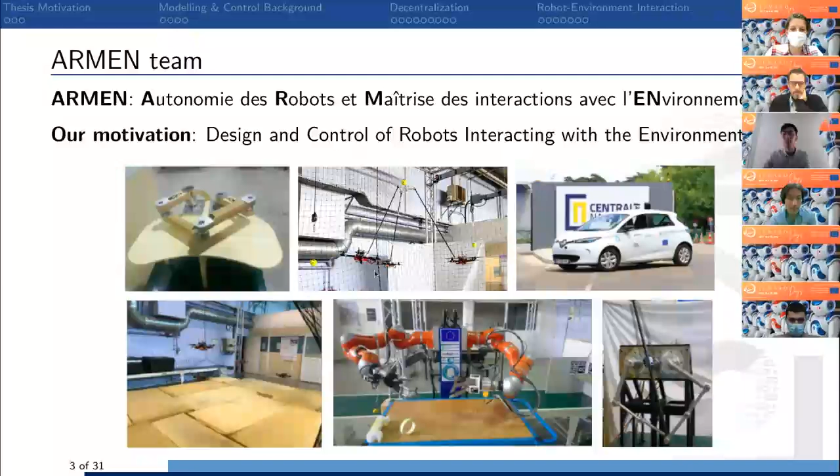Particularly in the drone group, we are mainly working on the design, control, and perception of aerial robots, just as I said for our research team.

Currently, we have 3 main PhD theses. Here, this is a flying gripper, I will mention it later because it is highly related to my topic. Also, we have 1 PhD student working on drone formations, in which multiple UAVs are controlled in their internal formations by an MPC controller. And also the flying parallel robots is my PhD thesis.

In our group, each year we also propose quite a lot of master projects. For example, there have been quite a lot of projects working on aerial cable-driven systems, where multiple drones support a payload using cables.

This year we have 1 project working on drone detection using deep learning algorithms, and also 1 student working on drone flipping, using a real-time simulation environment for validating his controller.

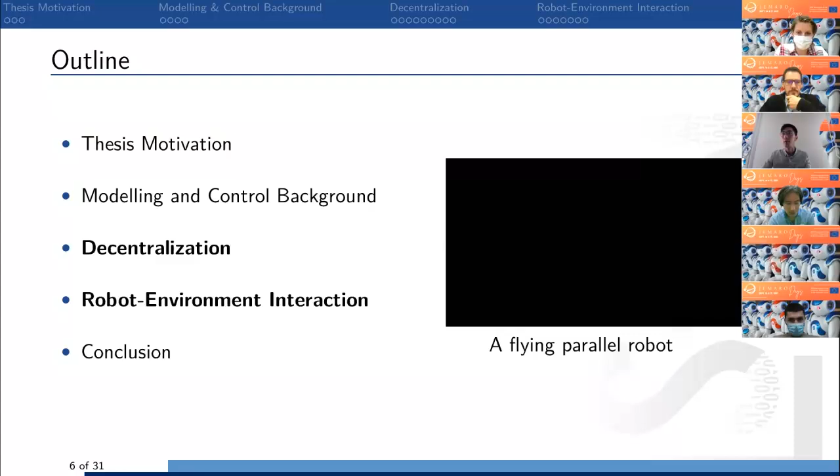So now, aligned with our motivation, my thesis is about a flying parallel robot. It is a new robot design with 3 drones. In the following, I will talk about the thesis motivation, give some modeling and control background, and also the main parts of my work: the decentralization of the robot and robot-environment interaction. Finally, I will give some conclusion and perspectives to finish my presentation.

First, let me give a quick talk about the context of my thesis: aerial manipulation. This domain is an emerging field where aerial vehicles, UAVs, are equipped with robotic arms or end effectors for grasping, transporting, and manipulating objects.

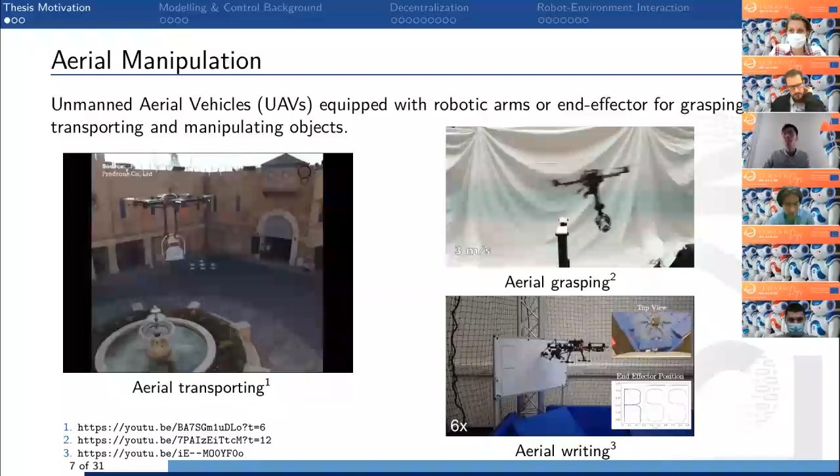As you can see in the example here, a very simple way of designing such robots is just to combine a multicopter with a classical robotic arm. There have been quite a lot of architectures proposed in the literature for aerial transporting, grasping, and even for aerial writing tasks.

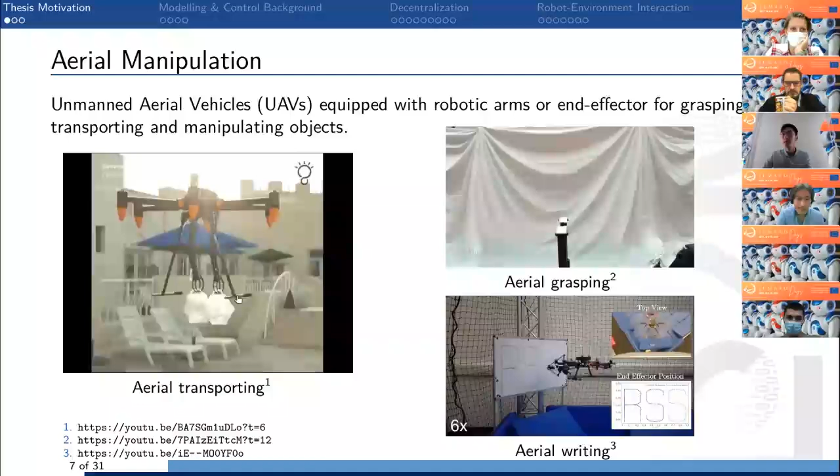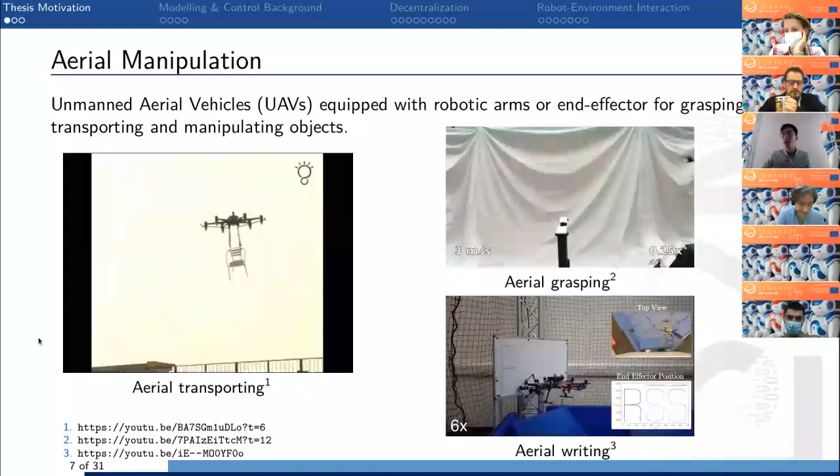However, these kinds of designs present some drawbacks, such as payload limit - payload capacity is limited by the thrust limit of a single UAV. Also, as we know, multicopter UAVs are under-actuated systems, meaning that the thrust force they can produce is always vertical to the body frame. So the manipulation tasks are quite constrained by this limit.

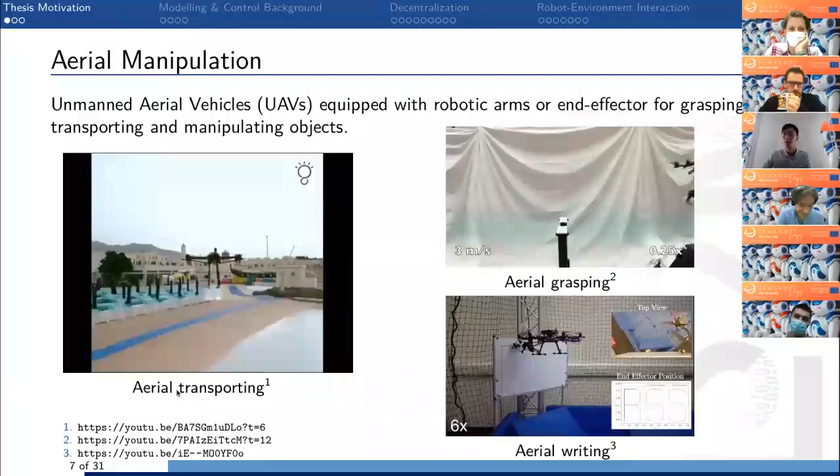Therefore, a new class of aerial manipulators has been proposed. We call them multi-UAV parallel robots. In this design, multiple UAVs are connected to a platform or payload using cables or rigid links. They show their strengths in the aerial manipulation domain because of the high payload capacity and full manipulability in three-dimensional space.

As I mentioned before, the Flying Gripper is also a new robot design we worked on in our team. There was a PhD student who just graduated, and in this design, four quadrotors are used to drive the platform collectively, with a gear and worm mechanism underneath each quadrotor. Beneath, we mount the grippers, and they can be driven by spinning the quadrotors, so no additional motors are needed in this design.

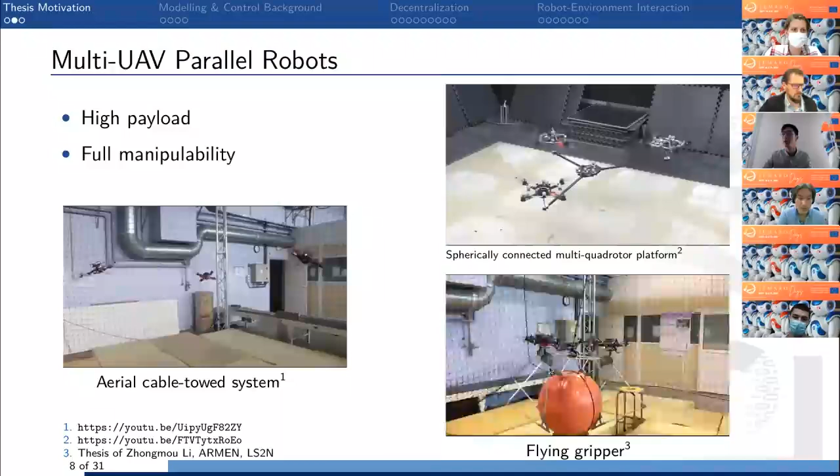However, the limitation of the current work on multi-UAV parallel robots has been that they all depend on motion capture systems, an external localization system for indoor environments. There's also a lack of consideration of significant robot-environment interactions. So the motivation of my thesis is to propose decentralized control of such robots without the need for any external localization system, and to accomplish real manipulation tasks that can be performed by the FPR.

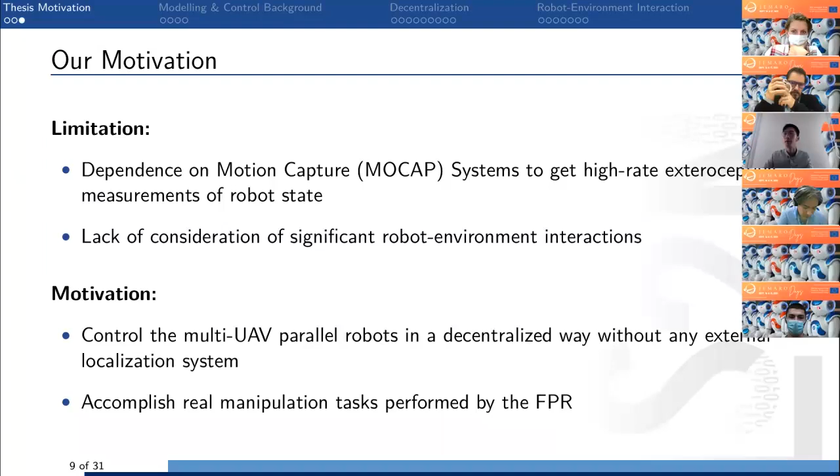Before talking about the main contributions, I will present the details of the flying parallel robot by providing the modeling and control background.

The FPR is actually an analogy to a parallel mechanism, but with the fixed actuators replaced by UAVs. The FPR prototype we worked on is composed of a moving platform and three rigid legs that are attached to the platform by means of revolute joints, one degree of freedom joints, and quadrotors are attached to the other end of the leg by spherical joints.

This design, the original design, is proposed in this master's thesis and in this paper written by previous PhD students in our team.

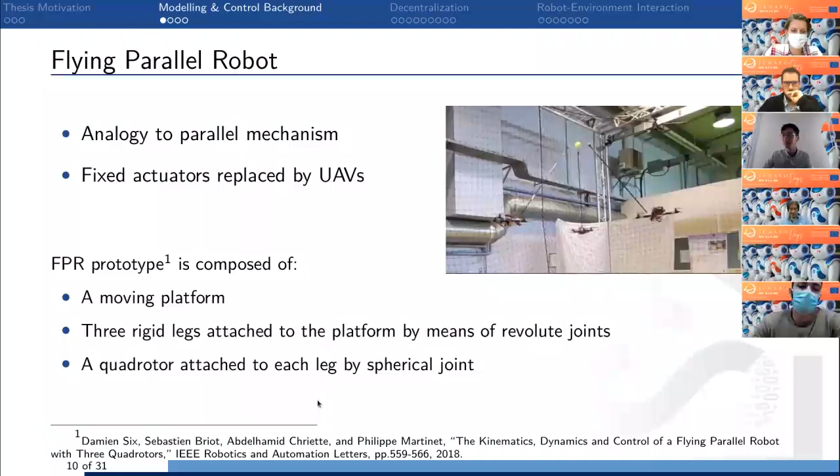The rest of the presentation will have quite a lot of equations, but I will try to be brief and not lose the generality of the talk.

The robot pose, the robot configuration of this robot, is composed of the platform pose and the leg angles. PP is the position of the platform with respect to a reference frame F0, and HP is a unit quaternion representing orientation. The robot velocity can therefore be given by the linear and angular velocity of the platform, as well as the leg angle rates.

As for the only actuation of the system, the thrust forces are produced by the quadrotors, denoted by Fi for each quadrotor i. The position, orientation, and linear velocity of each drone can be denoted by Pi, Hi, and Vi. Hi is also the quaternion-represented orientation.

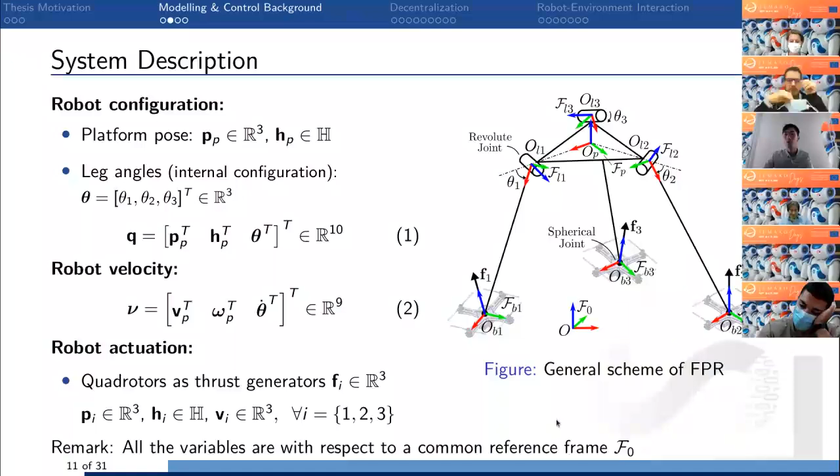A remark here is that all the variables we present are defined with respect to a common reference frame, F0. But if we lose the external localization system, this frame is meaningless. So in the next section, I will talk about how to deal with the reference frame if we no longer have the external localization system.

The modeling of the FPR can be presented by its geometric, kinematic, and dynamic models. I will present a little bit more about the dynamic model.

It actually builds a relationship between the input force, the thrust forces of the quadrotors, and the acceleration outputs of the robot. M is the generalized inertial matrix, and C is the Coriolis vector.

J is the Jacobian matrix relating the velocity of the FPR to the linear velocities of the drones.

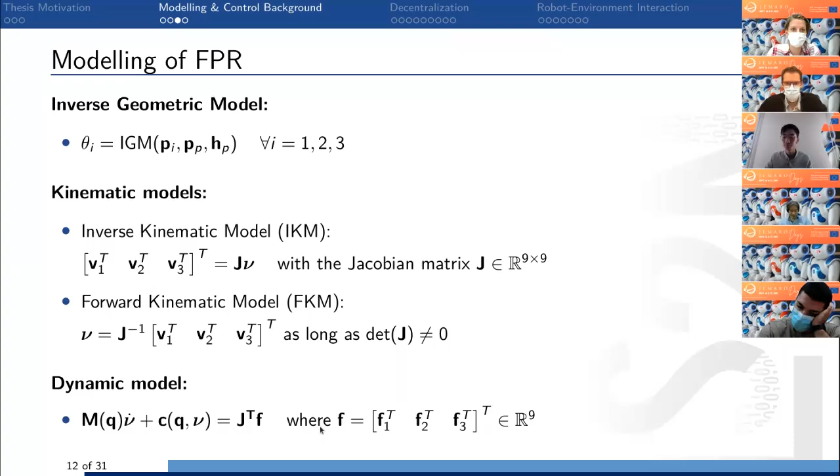As for the controller, we use the dynamic model to compute the thrust forces needed with an auxiliary input U. This U is computed by a PID regulation to minimize the tracking error towards the desired trajectory defined here. KP, KI, KD are positive diagonal matrices for PID gains.

After F is computed, we can extract each Fi for drone i, and the desired thrust magnitude and desired attitude of each drone can be further calculated, which are then sent to the inner loop, to each drone, and regulated by the inner loop thrust attitude controller.

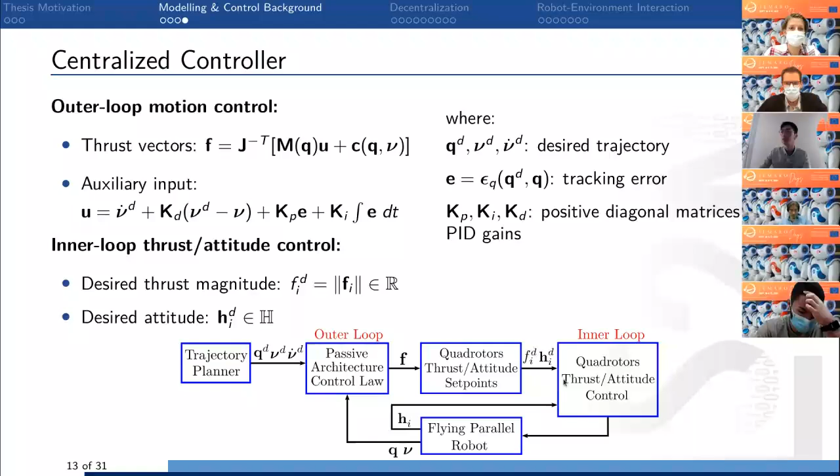So this is the overall workflow of the control. First, we have an offline trajectory planner to define the desired trajectories, and the outer loop is used to compute the input forces based on the trajectory tracking. Then we compute the thrust magnitude and orientation, the desired attitude of each drone, which is then sent to the inner loop attitude controller.

So let's now move on to the main parts of this presentation. The first part is the decentralization.

As I said before, the first motivation is to decentralize the control of the FPR, because in the centralized chain, all the robot states is captured by the motion capture system, and also a centralized computer runs the controller and communicates the control signals with each of the three drones. This is extremely sensitive to communication delays or interruptions.

So what we want to achieve is to first reconstruct the robot state without the motion capture system, by using onboard measurements distributed on each drone. Secondly, the controller is preferred to be implemented onboard each drone, probably with or without communication between them.

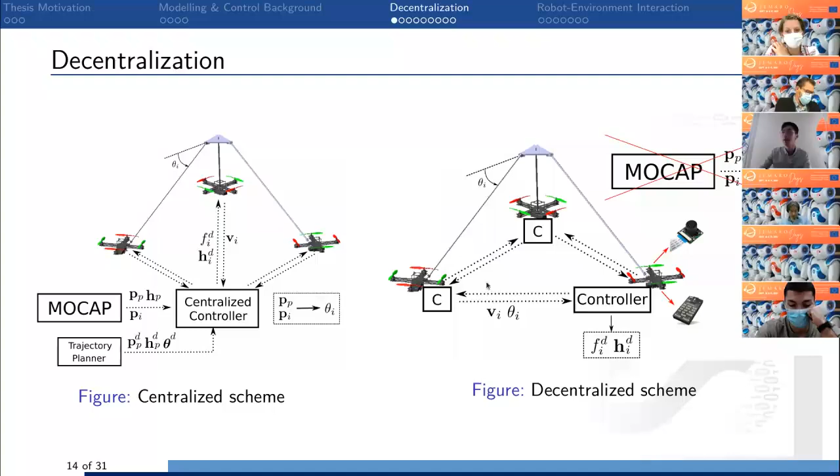As for the distributed measurement, the aim is to deploy onboard and intrinsic measurements to reconstruct the robot state. So we propose to mount a pinhole camera on each drone, which is able to measure the relative pose from the drone frame to the platform frame, represented by this rotation matrix. Then, together with the IMU sensor measurements, we are able to reconstruct the platform orientation.

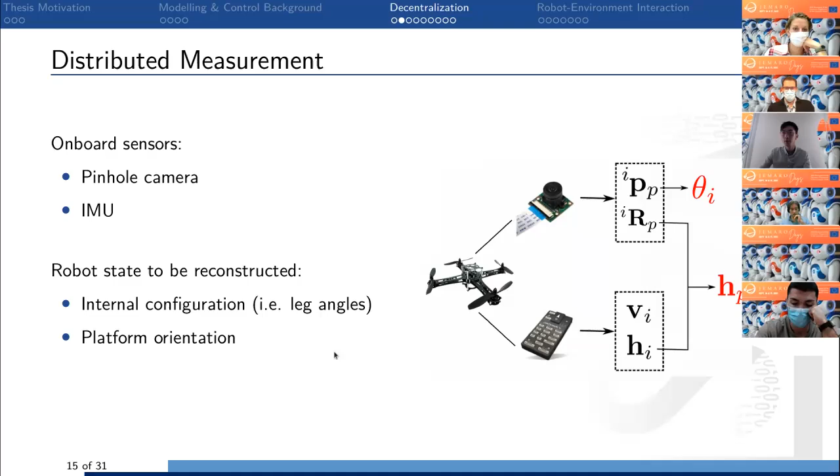So we start by proposing the measurement of the internal configuration, the leg angles. It was previously done by the geometry model, knowing all the body poses from the mocap system. Now, the leg angle is known if we know the relative pose between the platform and the drone's frame. This relative pose can be represented by a homogeneous matrix composed of a rotation matrix and translation vector. We found that this relative pose can be estimated by the onboard camera using techniques like model fitting or fiducial marker detection.

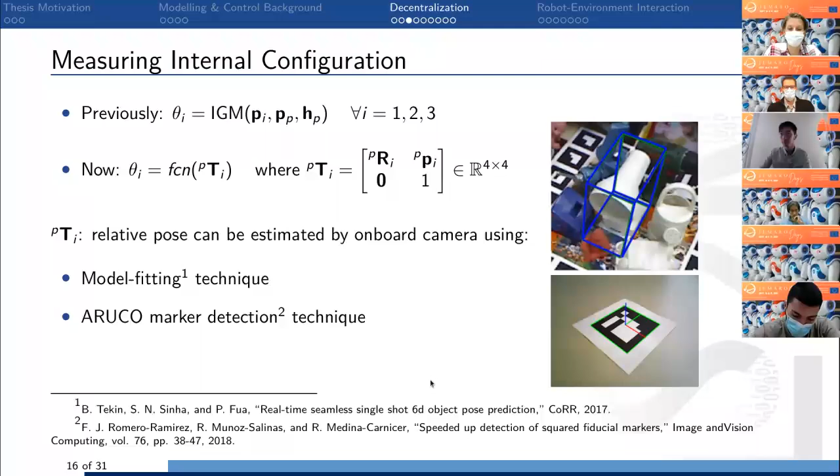Then for the platform's orientation, it was previously expressed with respect to the inertial reference frame F0, but which is no longer available now, since we consider there is no external localization system. However, we noticed that the onboard IMU measurements can provide well-estimated roll and pitch angles of the drones, and along with the relative rotation between the platform and each drone measured by the onboard camera, we can at least reconstruct the roll and pitch of the platform.

But to express these roll and pitch angles, we introduce two flat frames since we no longer have this reference frame. We call them flat frames, FFI and FFP, attached to the platform frame and each drone's frame. These flat frames have zero roll and pitch relative to F0, and an unknown relative yaw with respect to F0. Actually, these frames can be seen as here - the transparent platform there is a flat frame attached to it.

Furthermore, we found that this flat frame can be used as a common reference frame. So we use the flat platform frame as the reference frame for expressing all the robot states, such as the velocities of the robot. Finally, we are able to reconstruct the roll and pitch of the platform and the leg angles, leaving the platform position and yaw as unknown values.

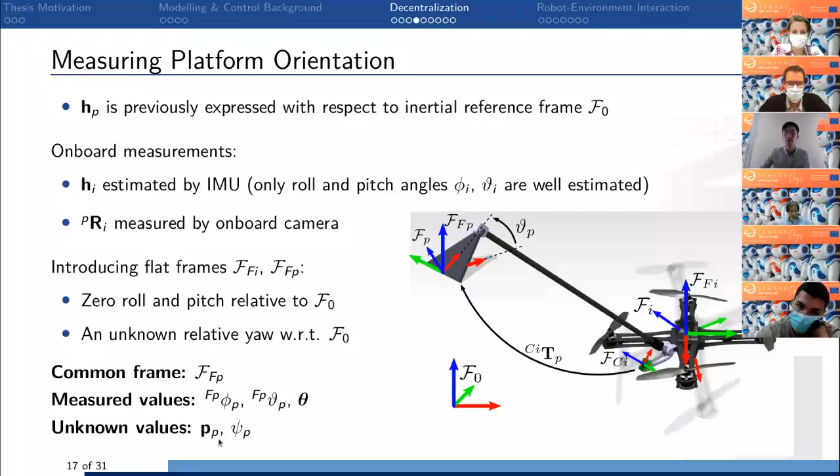After having reconstructed a partial set of robot coordinates, we now consider how to better control the robot with these variables. So we propose to control the known variables by their desired values and unknown variables by their derivatives. As a result, we can formulate a new vector of the controllable coordinates set, chi. It is composed of the linear velocity and yaw rate of the platform, coming from the unknown values, and the roll and pitch of the platform and the leg angles.

Finally, this is an easily teleoperable system, with an operator defining the desired chi and chi dot to get the partial information on the desired trajectory. And as I said, the unknown P and Psi are controlled by the derivatives, and the known values are controlled by the desired values.

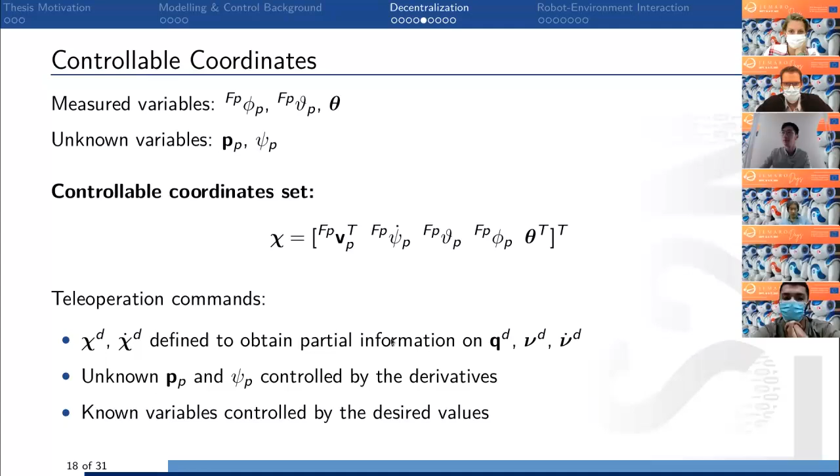Then we also deploy the controller in a decentralized manner, which means that each drone performs its own measurements and implements its own controller onboard. The controller itself is not different from the centralized control, but compared to the centralized controller, it is obvious that the decentralized controllers are more robust to communication delays or interruptions.

And for computing the control on each drone, it will require information on the other leg angles, theta j, and the linear velocities of the other drones, Vj. So based on whether this information is available or not, we propose two decentralized controllers, named C controller and NC controller. In C controller, all the drones exchange the most recent measurements between each other, and in NC controller, the information of theta j is always the desired values computed from the teleoperation command.

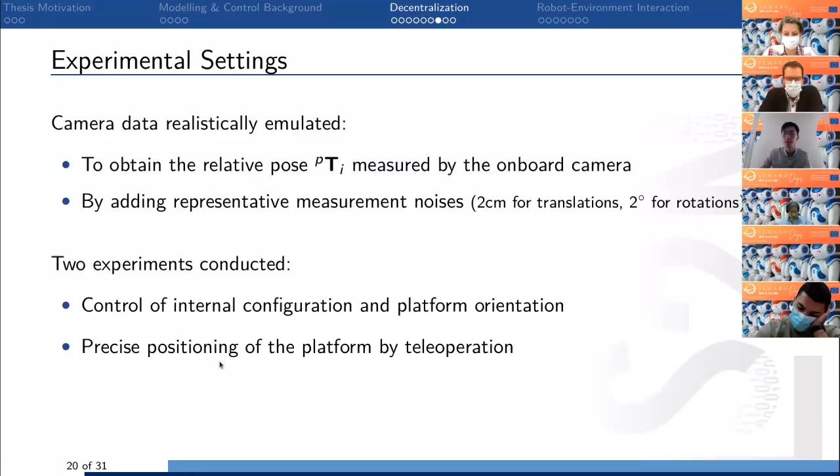So two experiments were conducted. The first one focused on the control of the internal configuration and platform orientation, and in the second, a precision task is performed by teleoperation. I will show you some videos of the experiments.

This is showing the control of the internal configuration and platform orientation. We can see blue curves representing the leg angles, red for roll of the platform, and green for the pitch of the platform. In both cases, both controllers can well track the desired commands sent by the operator.

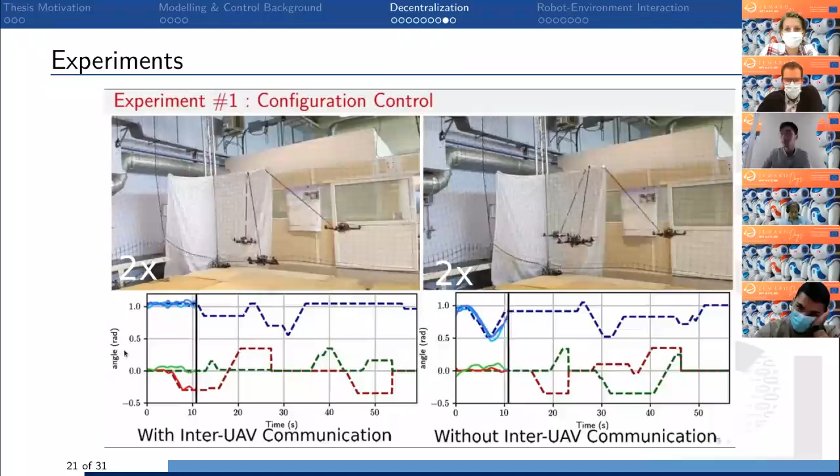In the second experiment, we perform the precision task by placing the platform underneath three tennis balls hanging in the air.

The plots here are showing the positioning error of each task. Once the positioning error falls below 10 centimeters, the operator is given 10 seconds to try to pick up the ball. If the ball is picked up successfully, we can see that the positioning error is stabilized and within 5 centimeters, showing that it is a successful task.

During the whole experiment, we performed 7 positioning tasks towards 3 markers in a loop, and both controllers successfully accomplished the tasks, showing that precise positioning of the platform by teleoperation is achievable.

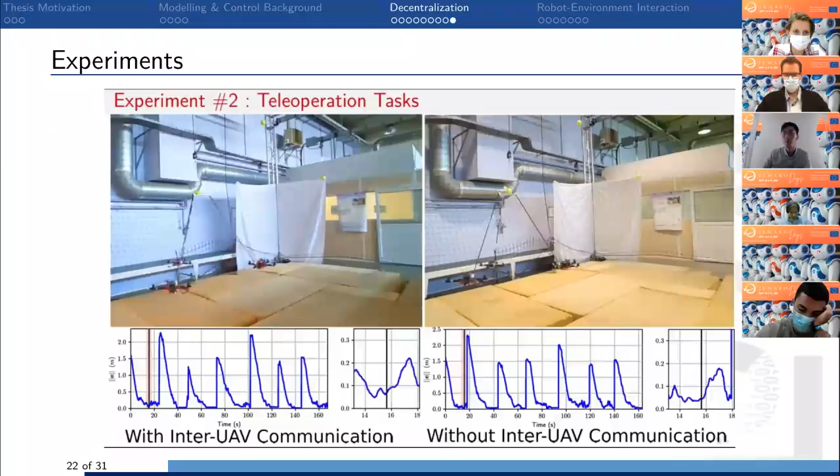Now let's move on to the second part, which is recent work that I've done. The current control strategy I presented has shown its effectiveness in controlling the robot in free space. However, it is no longer appropriate if we consider significant robot-environment interaction.

As you can see in these examples, with the previous controller dealing with an additional mass attached on the platform, the platform can no longer be controlled stably. The flight is a simple hovering flight, but we can see there are large orientation errors, and also large leg angle errors.

During the interaction, the robot is usually subject to disturbances such as the winds, ground effects, and uncertainties on the drone thrust, and also modeling errors, as well as the potential interaction wrench, meaning the force and moments exerted on the robot.

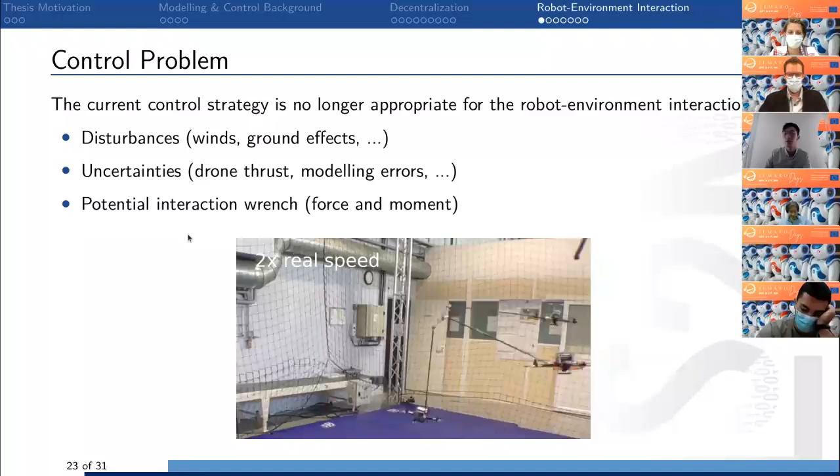An interaction control strategy should be able to properly react to all these influences coming from the environment. To do that, we should first have knowledge of the external wrench exerted on the robot. So we applied an external wrench observer to reconstruct all the external terms present in the system.

Based on the dynamic model, we know that the robot should perform in a certain way. If the output performance is not exactly as expected, we should be able to estimate the external terms that affect the robot. So we include this tau E in the dynamic model to represent the external forces or moments acting on the robot by the environment.

As mentioned, if we know the system input F and the actual response of the robot, its position and velocity, we can estimate this external wrench tau E hat. This estimate obtained by the observer can further be fed into the controller to regulate the interaction.

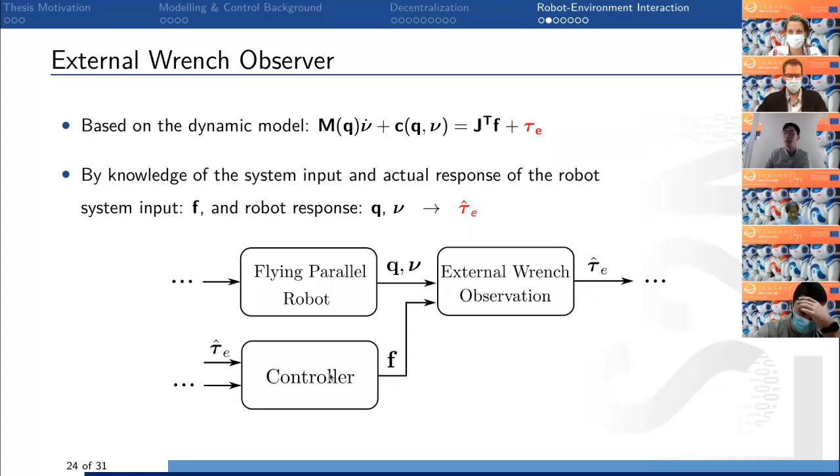After having the knowledge of the external wrench from the observer, we should consider how to control the robot in consideration of the interaction. The aim of the interaction is to ensure compliant behavior when the robot interacts with the external environment.

The impedance controller shows its strengths because it regulates the interaction force by a virtual mass-spring-damper system. Of course it is not a real mass-spring-damper system as we know it in mechanical engineering, but the controller can regulate the robot to behave as such a dynamic system during interaction with the environment. The impedance behavior can be written in this matrix form, with MD, KD, BD as the positive diagonal matrices for the desired mass, spring, and damping coefficients.

Epsilon tau here is the external wrench tracking error, with minus tau E hat being the reaction force or moments the robot exerts on the environment, and tau ED being the external wrench that the robot is expected to exert on the environment.

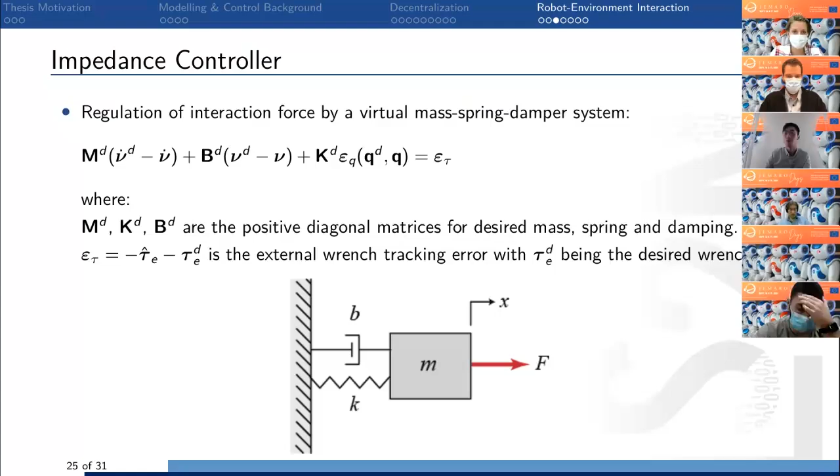So the complete observation and control framework is shown in this block diagram, similar to what we have seen in the control background. Offline trajectory generation defines the desired trajectory, and an observer is applied to estimate the external wrench and then send it to the impedance controller.

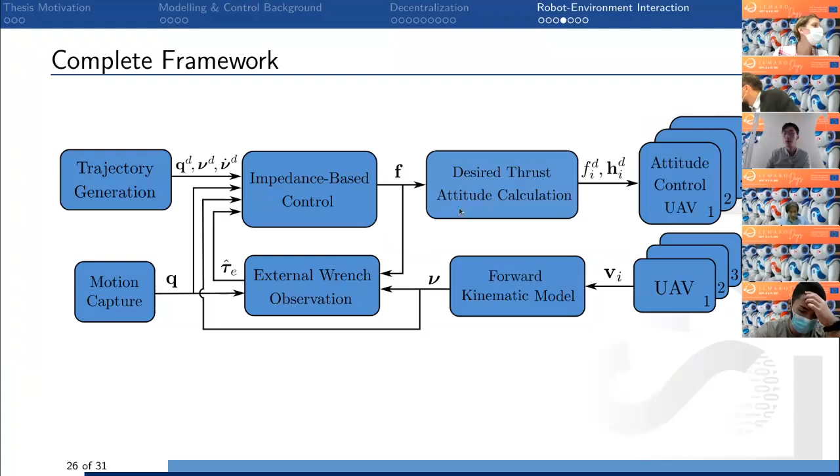So the later just computes the control input, the thrust forces F, and the rest of the workflow is quite similar.

Two contact-based tasks were performed. The first, we tried to interact with the wooden board in flat orientation, and in the second, this board is inclined at an angle of about 25 degrees. The board is installed stably in the air by the stretched ropes.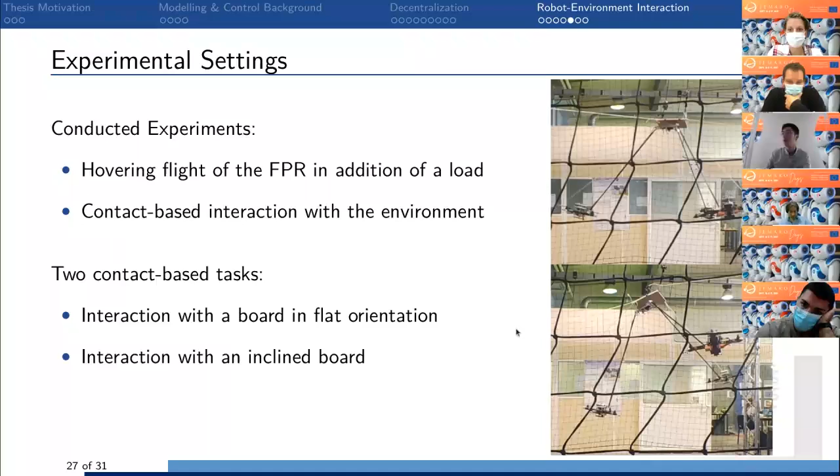In the first experiment, we showed that the impedance controller still stably controls the robot with the disturbance of the additional mass, while the PID controller is no longer working. We also performed the hovering flight with external winds generated by the fans, and the impedance controller is also better in terms of the tracking error.

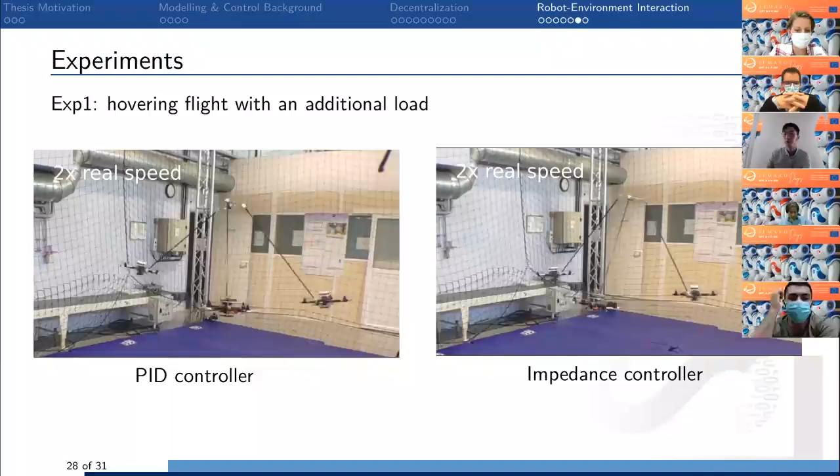During the second experiment, we demonstrate that both tasks can be well performed by the FPR. The impedance controller is trying to regulate the robot pose towards the desired interaction pose, while an operator is providing the desired force the robot exerts on the environment. Although we only did contact-based interaction experiments, the method we presented can be extended to accomplish more complex tasks, which are potentially achievable since the external wrench acting on the full degrees of freedom of robot state is estimated.

So finally, some words to end up my presentation. In previous works, we have proposed a methodology to control the multi-UAV parallel robots without dependence on external localization systems. Although we still use the mocap to emulate the camera data, the method can be easily applied to the real detection and estimation system using real onboard cameras.

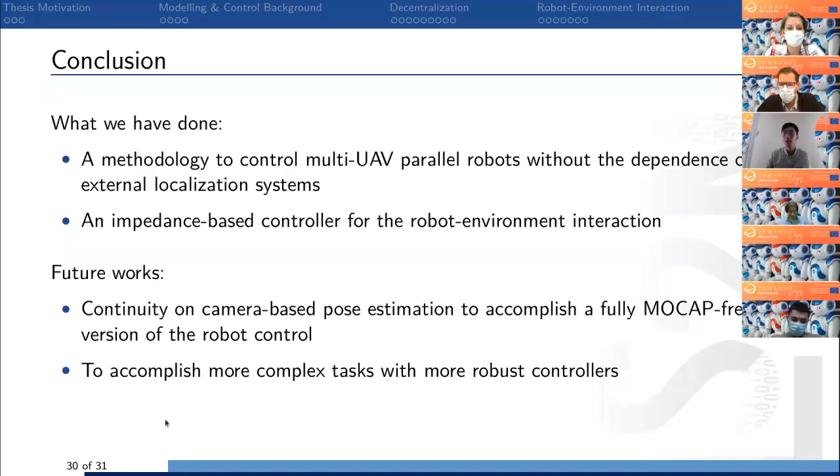Thanks for your attention, and this is all for my presentation. I'm happy to answer your questions.

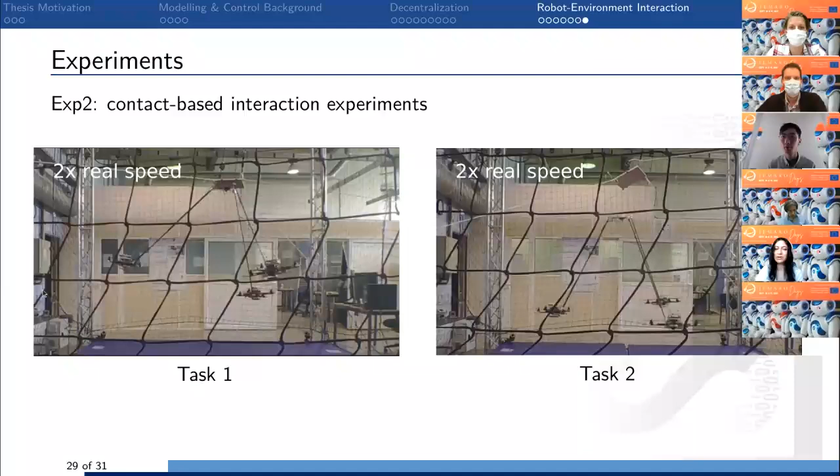Thank you so much. Thank you for your questions. Okay, thank you for these questions. So we have time. Any other questions for Shiyu?

Maybe Shiyu, I want to ask you a few questions. Basically, with the help of the camera, what is needed for you? Is it the pose of each UAV, or do you have to measure the inter-distance by making detection of the other UAV?

By using cameras, we are not detecting the other UAVs. We try to mount a camera on each of the drones. So the camera is measuring the relative pose between the platform and its own frame. It's detecting the platform rather than the other drones.

Okay. And yes, because you saw yesterday the presentation of Guillaume Caron, so the question is, do you plan, from your opinion, would it be better to use some fisheye camera or large field of view camera, or do you plan to use a classical camera? What do you think about that?

I haven't tested, but for me the problem is the field of view. The leg angles in my robots are limited, quite constrained, within 0 to pi over 2 degrees, radians, sorry. So if the platform is always within the field of view using classical cameras, why not use it? But if sometimes the platform is no longer inside the camera view, probably it's better to use a fisheye or other camera.

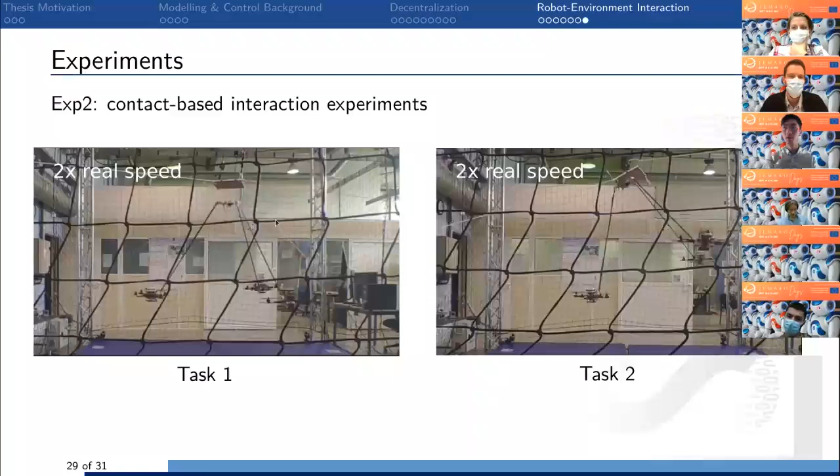Okay. And if I understood well, you don't use any communication between the UAVs, right? You don't communicate any position or information? We don't communicate the position, but in our controller, sorry, let me come back.

In our work, we propose two decentralized controllers. First we communicate between the UAVs this information, because on each UAV we measure the leg angles, and we also have the linear velocity of each UAV measured by the IMU sensor. So in the first controller we communicate this information, but we also found that...

We can propose a non-communication method in which the UAVs assume that each of the other UAVs performs or tracks well the desired states. In this design, we just use the desired commands to compute the theta and the VJ of the other drones. So both cases are achievable.

Okay, great, great, thanks a lot. Any other question? Yes, I will turn off my mic.

Yes, go ahead. Hello, I have a question. To my understanding, it looks like the model is based around taking the three drones and translating their motion through the legs into the platform.

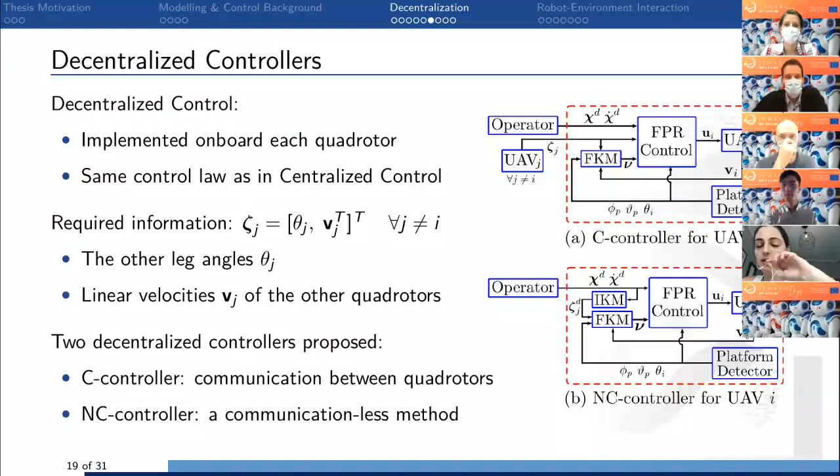As I mentioned, we have a real-time simulation environment called Gazebo. This is only for flying of one drone, but we have also implemented a simulation environment for the FPR. So all the controllers I ran in real life were tested in these simulation environments beforehand.

Okay, thank you. You're welcome. Thank you. One more question, maybe? Could you ask a question? Yes, please.

I think in your research, 3 drones were controlled. I am very interested in the situation where more than 3 drones can be controlled or not. Do you have some opinions about this?

Yeah, we use 3 drones simply because it is a fully actuated system: we have 6 degrees of freedom on the platform and 3 degrees of freedom on each of the legs, and each drone can produce a 3-dimensional force. So 3 times 3 is 9. This system is fully actuated, so we don't have problems of over-actuation or under-actuation, but it is possible to have multiple drones, like more than 3, but then we would have to deal with the over-actuation of the system.

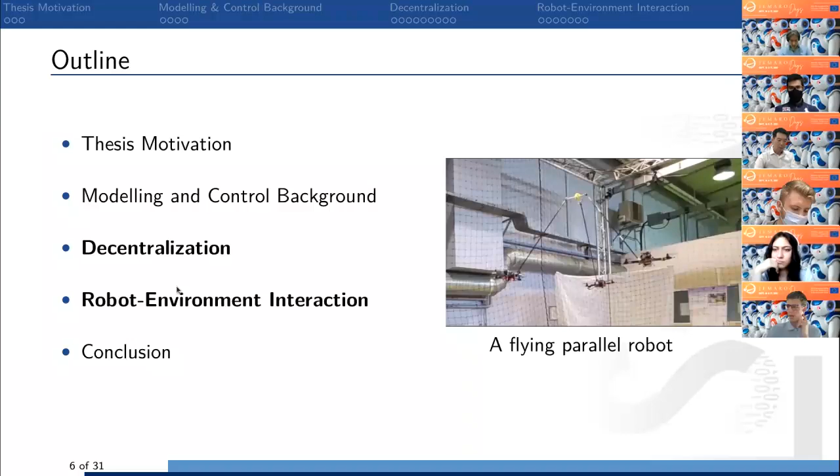Okay, actually, as for the control part, there is not much difference, because the Gazebo environment is really a real-time simulation environment. The drone models are just the same as run on the real drone board.

But the difference is more related to the communication. In this environment, you don't have any communication delays, and even the measurement noises are really low. Maybe you can set some measurement noises, but it cannot always represent the real world noises. So coming from the simulation environment to the real world, we really struggled a lot, mostly on the communications part.

Okay, thank you. Any other question? Maybe Shiyu, could you detail the technical aspects of the UAVs for people? Are there commercial UAVs, quadrotors, or did you make them? Could you detail?